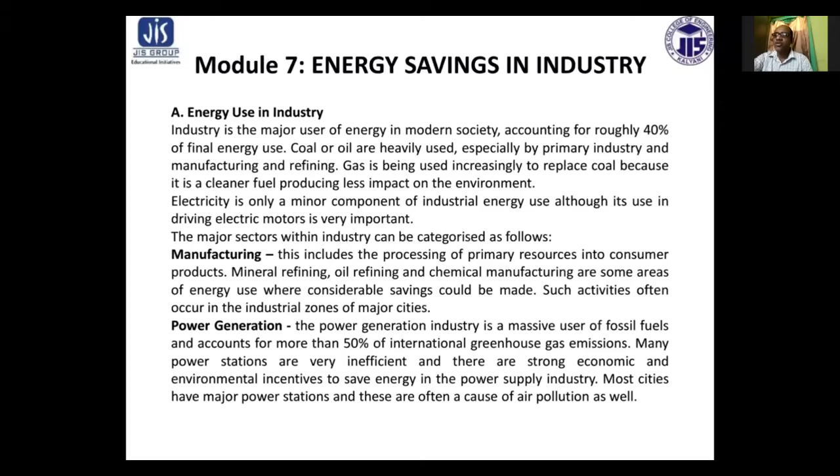Power generation. The power generation industry is a massive user of fossil fuel and accounts for more than 50% of international greenhouse gas emissions. Many power stations are very inefficient, and there are strong economic and environmental incentives to save energy in the power supply industry. Most cities have major power stations, and these are often a cause of air pollution as well.

Mining industry is also a major source of industry where significant energy is used. It is a primary type of industry which generally occurs outside cities, often in remote parts of the country. Energy intensity is high in most mining operations, but there is an incentive to save energy because energy wastage is reflected in the cost of minerals. So if energy waste is more, the end product cost will be more. So in the manufacturing sector, power sector, mining, agriculture, construction, everywhere, if energy wastage is there, ultimately the end product is costlier.

Agriculture industry is another major user of primary energy which takes place in rural areas and is largely beyond the scope of city government to influence. Construction is a modest user of energy, particularly liquid fuel, because this activity often takes place at sites where electric power is not readily available. Considerable savings are available in this sector because there is often a large amount of wastage in construction activities. The main focus will therefore be on energy savings in manufacturing and power generation, as these are the major users of industrial energy in cities.

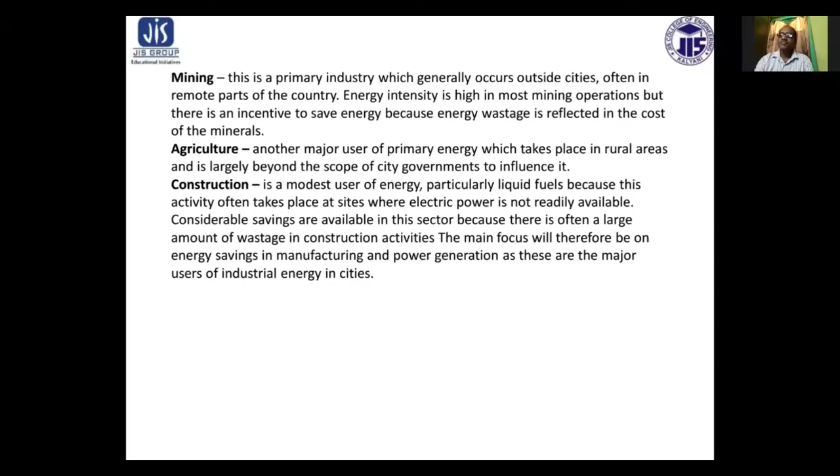Energy auditing in industry. Energy auditing in industry takes a similar approach to audits undertaken in the commercial sector. An analysis of existing energy consumption records to determine where, how, and how much energy is being used in the plant. It will also seek to identify trends in consumption data. A walkthrough audit that documents where the main areas of energy consumption exist within the plant. This phase will identify any obvious areas of wastage together with the most promising areas for potential savings.

A detailed analysis phase, which will take the data obtained in the previous two phases and prepare detailed plans for energy savings options. These plans will include detail on energy use and cost of each stage of the production process, as well as costing and expected payback period of the various energy savings options proposed. In the case of industrial sectors, the main focus should be level 3 auditing, where the individual processes are analyzed. For example, the production of steam for use in commercial laundries.

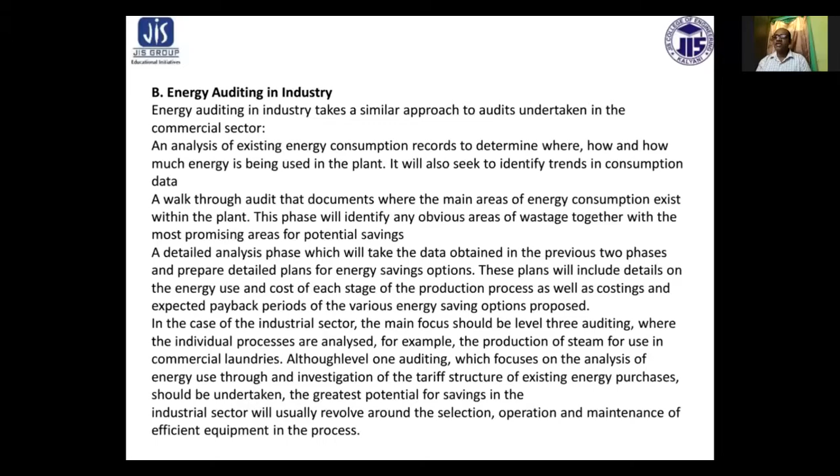Once the initial energy audit has been undertaken, it will provide an important first step in monitoring and achieving progress towards energy efficiency goals. This information is the baseline energy consumption, or the energy use associated with current practices in the factory as well as existing equipment. This is identified as T suffix 0, that is T0. This is the energy consumption prior to any systematic energy efficiency measures being undertaken.

In conjunction with the results of the screening survey, the establishment of this baseline information allows energy managers to set targets for reduced energy consumption, which can be achieved through changes in the management and operation of the industrial processes, as well as targets which would be possible through the implementation of energy efficient technologies. In this regard, some targets are fixed, and these are categorized into short-term energy efficiency targets, long-term energy efficiency targets, and innovative energy efficiency targets.

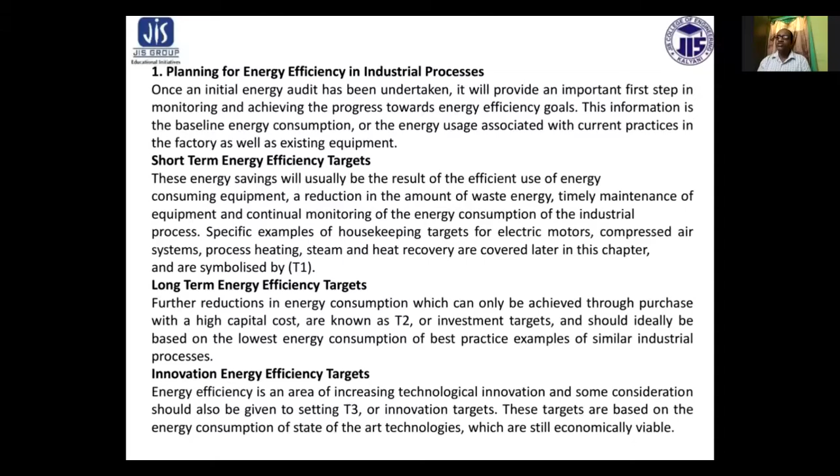Number C, strategies for energy savings in industries. The strategies for achieving energy savings in industry are quite different to those for most other sectors. Industry is very diverse and is often controlled by very large multinational corporations. In this context, the appropriate approach needs to be carefully considered. Industry is generally receptive to efforts to cut its energy cost, but is less likely to be attracted to regulatory measures that increase its operating cost.

The technical options available for energy savings in the industrial sector are as diverse as the industries themselves. However, they principally revolve around the savings of energy in areas such as electric motors, compressed air, steam, furnaces, and heat recovery equipment.

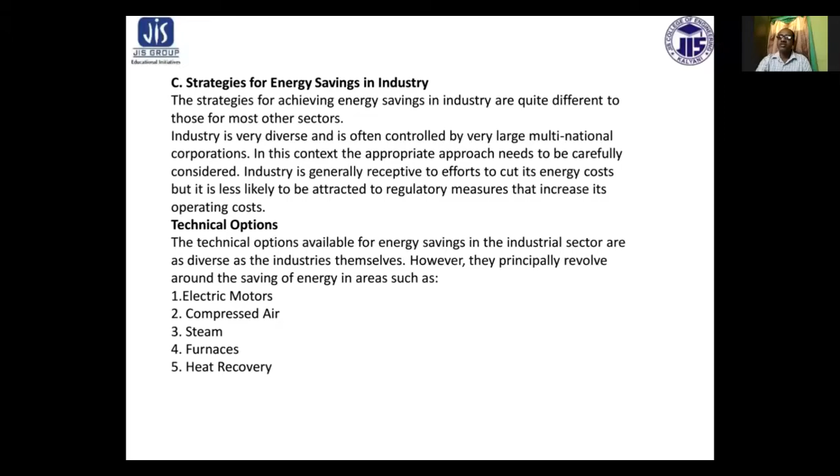The production of on-site power and heat or steam through cogeneration systems or combined heat and power cycle systems can result in energy savings through the utilization of waste energy associated with the production of power. Opportunities for energy savings in relation to the operation and maintenance of industrial buildings also exist, although these are often similar to the commercial sector.

Now, energy savings in electric motors, and vice versa. Electric motors usually account for almost half of total industrial energy consumption and represent a significant opportunity for financial savings from energy consumption.

Four areas offer potential savings with regard to the selection and operation of electric motors: energy efficient motors, that is T2, which comes under long-term energy efficient strategies; variable speed drives, which also come under the innovative ways; correctly sized motors, which are similar; and regular maintenance, which comes under the short-term strategies.

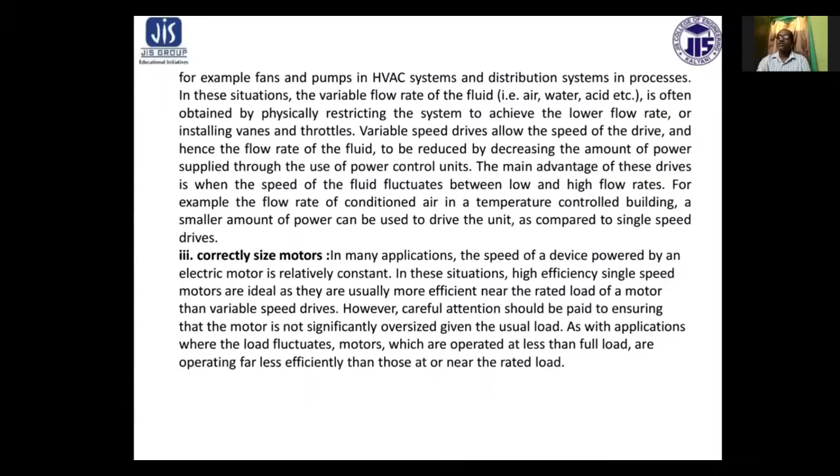Variable speed drives allow the speed of the drive, and hence the flow rate of the fluid, to be reduced by decreasing the amount of power supplied through the use of power control units. The main advantage of this drive is when the speed of the fluid fluctuates between low and high flow rates. For example, at low flow rates of conditioned air in a temperature controlled building, a smaller amount of power can be used to drive the units as compared to single speed drives.

Correct motor sizing. In many applications, the speed of a device powered by an electric motor is relatively constant, and hence the rated power consumption is also constant. In these situations, high efficiency single speed motors are ideal as they are usually more efficient near the rated load of a motor than variable speed drives.

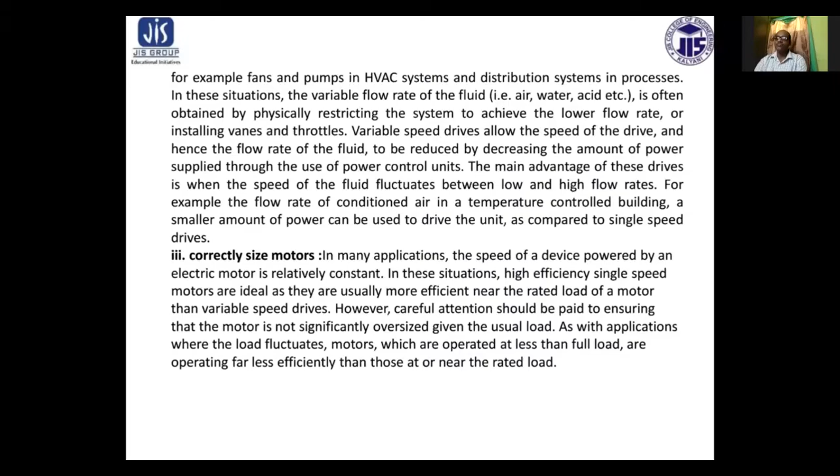Next, maintenance of electric motors is an important parameter for energy savings. As with other pieces of capital, electric motors and the devices they drive should be regularly serviced and maintained to ensure components are clean and free from dust and oil, operating at peak performance as compared to manufacturer's specifications, identify areas of wear or damage before the performance of the motor is degraded, and increase the operating life of the motor.

Frequently, when motors fail, it is due to a fault in the stator wire. In this situation, rewinding the wire usually repairs the motor. Whilst a motor can be rewound to have about the same level of efficiency, some reduction in efficiency will usually occur.

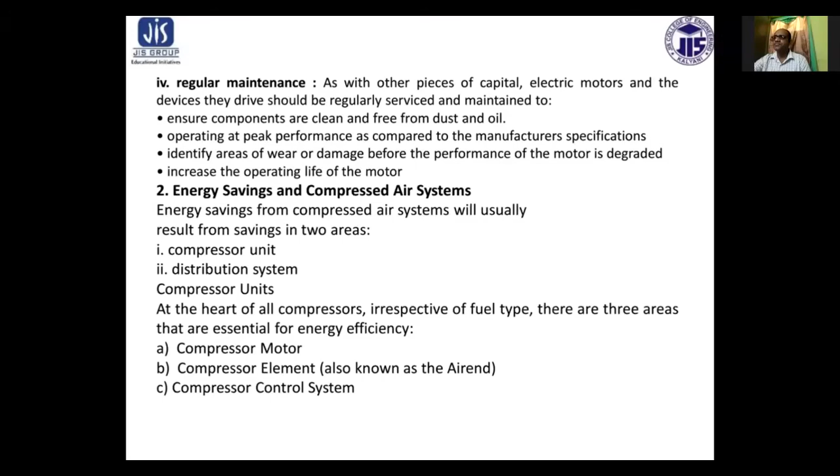With this, we would like to conclude today's session. In the next session we will discuss the other factors.